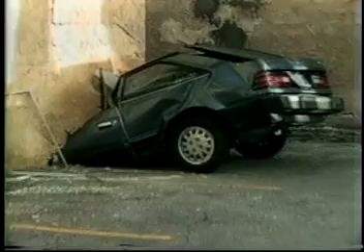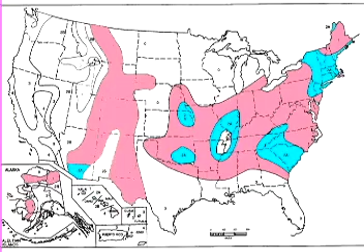Earthquakes. The potential for human tragedy and economic disaster are overwhelming. Though California is a state most people think of when they think of seismic activity, there are major fault lines throughout the United States. In fact, earthquakes in many other parts of the country in recent history have proven that seismic events happen nationwide. As a professional serving the commercial construction industry, you and your company need to be aware of the repercussions of these natural disasters.

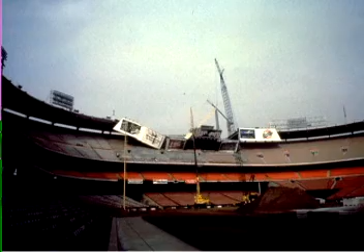If you are responsible for the engineering, construction, or inspection of a building that is involved in an earthquake, knowing that you could have helped avert human tragedy and economic disaster but didn't, could be both personally and professionally devastating.

That's why state and local building codes require that all buildings have engineered seismic restraint systems installed on non-structural utility systems suspended from the tension zone of overhead decks or other supporting structures, with no geographic restrictions. Ignoring or bypassing these requirements in today's litigious climate can result in disastrous consequences.

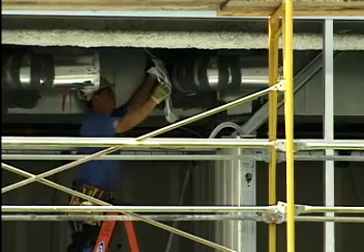There are many options for complying with the building codes. Unfortunately, most options demand extensive custom engineering, require highly skilled subcontractors for proper installation and supervision, and utilize a variety of proprietary elements that restrict flexibility and increase installation costs.

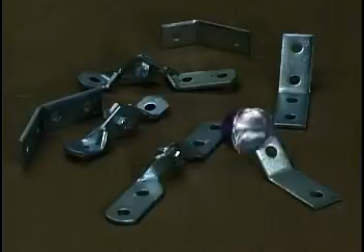But there is a better way. It's called ISAT, International Seismic Application Technology. ISAT was designed to simplify and streamline seismic bracing and building code compliance by reducing the cost and complications of designing, specifying, installing, and inspecting seismic bracing for the mechanical, electrical, and plumbing trades.

But that's just the beginning. ISAT has also been uniquely designed to comply with the building codes of every state and region. So no matter where your business takes you, you can rest assured that if ISAT is in use, your project will meet all state and federal seismic bracing building codes.

ISAT has combined years of seismic bracing engineering and design experience with extensive fieldwork, including coordination and supervision of hundreds of job site installations, to develop the ISAT seismic bracing system. ICBO and OSHPD approved, the ISAT system is fast becoming the de facto standard for meeting the latest code requirements anywhere in the country.

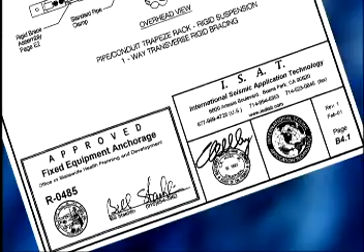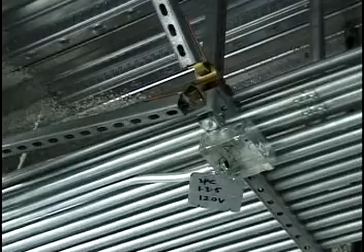This system has been designed to clear up the sometimes confusing and vague language of the various building codes, while providing an extremely thorough step-by-step process for engineering and installing seismic bracing in any seismic zone and in any building type. In addition, most of the components used in the ISAT system are non-proprietary, making it the most cost-effective seismic bracing system on the market today.

One of the main components of the ISAT system is the patented ISAT seismic rod capture bracket. This ICBO-approved bracket can utilize strut, cable, or ceiling wire as a brace member. Its unique design permits easy attachment without having to remove existing hardware, allowing the system to be installed at any stage of the construction process.

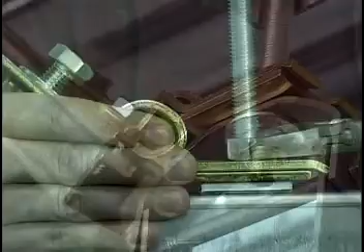This can dramatically reduce labor costs, as seismic bracing installation can be scheduled and installed around more costly construction. This design enhancement also dramatically reduces the costs of retrofitting.

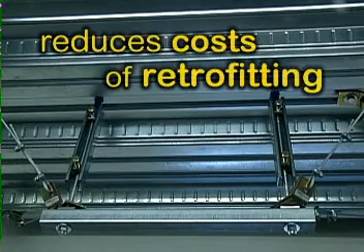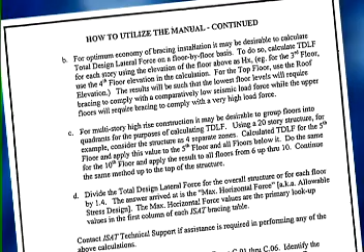Another one of the key components of the ISAT system is the design, installation, and inspection manual. This comprehensive manual provides detailed guidelines for engineering, installation, and inspection of seismic restraints for suspended utilities. This manual is a virtual library of engineered application details, providing simple step-by-step instructions on how to engineer, lay out, and install seismic bracing on any type of utility in any structural environment.

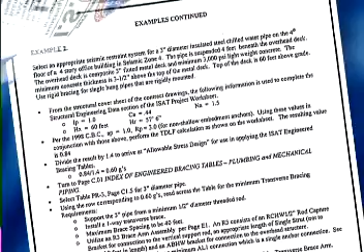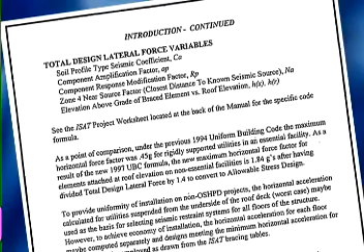Whether you're a design professional, a contractor, or part of an inspection team, this manual will provide everything you need to know about seismic bracing of mechanical, electrical, or plumbing systems in new or retrofit construction.

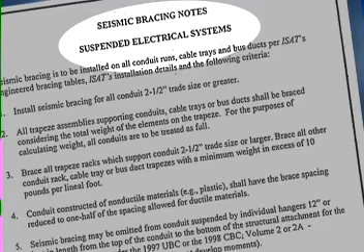Translating the language of the various building codes into easy-to-understand layman's terms, the manual breaks down the various requirements for bracing, shows when bracing is needed, and most importantly, shows how to avoid bracing when possible. Its details encompass a range of efficient seismic bracing options with specific attention to ease of installation in congested areas, a problem common to most projects on which seismic bracing is required.

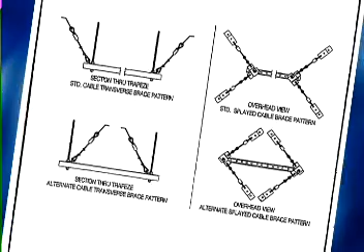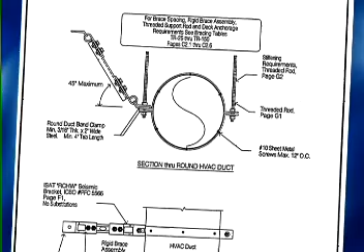Every MEP trade is uniquely addressed, with easy-to-understand seismic bracing layout tables that clearly show what options are available for each specific installation requirement. Whether it's HVAC duct,

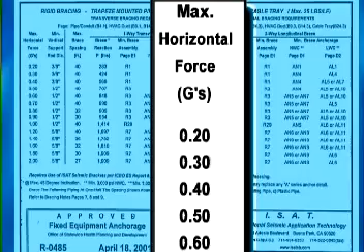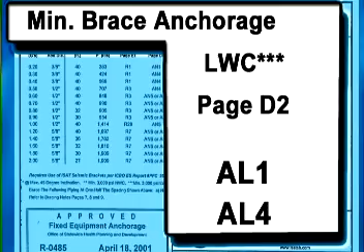mechanical piping, mechanical equipment, plumbing and process piping, electrical conduit, electrical cable trays and bus duct, or vibration-isolated suspended utilities. The ISAT design, installation, and inspection manual provides extensive details for proper installation. Included in the manual are tables that show specific horizontal G-forces for all seismic hazard levels, rod sizes at all seismic locations, spacing for all transverse and longitudinal bracing, specific anchor details and installation instructions including drill depths and torque settings for all types of construction, and rod stiffener requirements. These tables provide the construction professional with all the information necessary for any project, regardless of the construction type or geographic location.

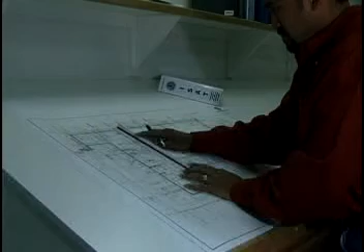But ISAT goes one step further. The ISAT staff of engineers will actually develop a location-specific plan set layout for its customers. Here's how it works. The ISAT staff reviews the project specifications, then gathers all the pertinent job site information from the contractor, taking into consideration local building codes and site-specific seismic criteria. Next, bracing options are developed based on the job site conditions and the contractor's preferences.

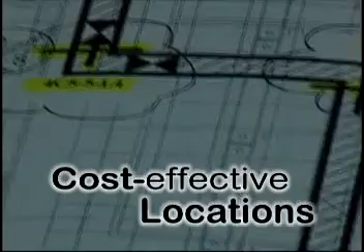An engineered submittal is then created reflecting the specific project and local building code requirements and conditions. A plan set layout is then drawn up on the contractor's project drawings. This layout shows the minimum amount of seismic bracing necessary, the most cost-effective locations in relation to installation labor, and the location and type of brace assembly coded for each specific seismic brace location.

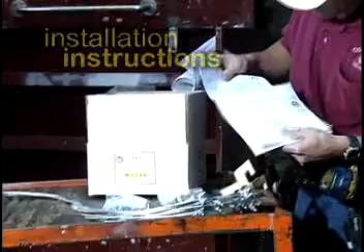The brace assembly codes match location-specific, ISAT-assembled seismic bracing kits that contain all the necessary hardware for that specific installation, as well as complete installation instructions, including bracing options in case of job site congestion. By taking all of the guesswork out of the installation, the contractor can now utilize the most cost-effective labor on the job to perform what is usually considered one of the most complicated of all construction tasks.

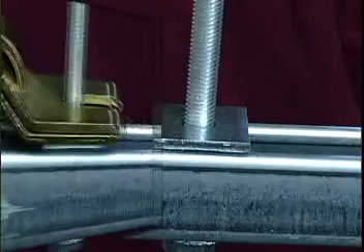ISAT saves you both time and money by providing complete, project-specific, engineered submittal documents and installation details for each of your projects. ISAT systems utilize ICBO-approved rod capture brackets for ease of installation. ISAT provides an easy-to-understand plan set layout showing all bracing locations for the specified project.

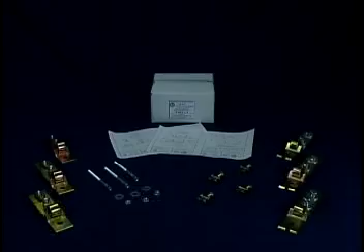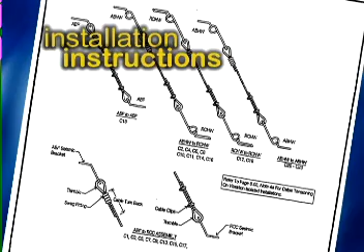ISAT provides seismic bracing kits that match the plan set for each specific location. And because the kits are pre-approved to meet code and include comprehensive and easy-to-understand installation instructions, they dramatically reduce the potential of costly rework because of bracing that doesn't fit or pass inspection. These kits also allow the use of the most cost-effective labor to install the systems. When all these factors are considered, ISAT has the lowest installed cost of any system available.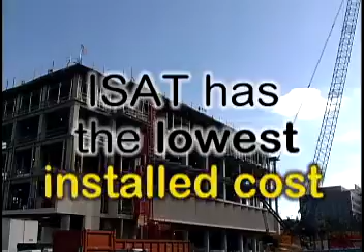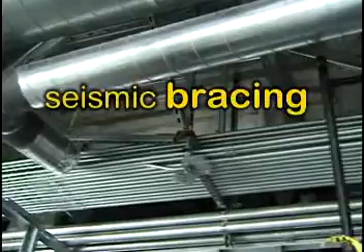Our customers will attest to that. That's why the list of ISAT projects continues to grow at an astounding rate. When it comes to seismic bracing, don't take chances. Call the company that takes all the guesswork out of the equation. ISAT. We concentrate full-time on seismic bracing, so you don't have to. No matter what scope of the construction process you are responsible for, contact ISAT to find out how our system can save you money.